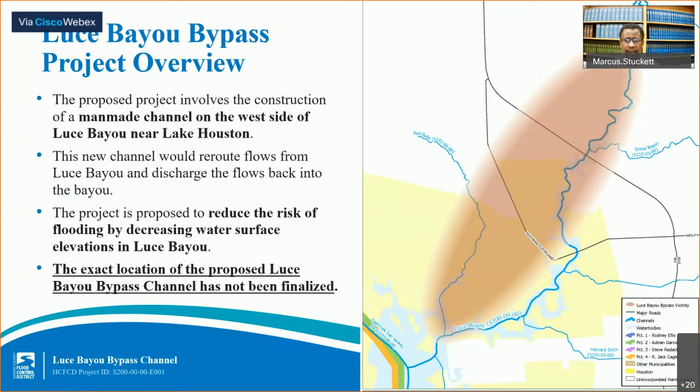The proposed Luce Bayou bypass channel project is one of the recommended projects that resulted from the Huffman area drainage analysis. The Huffman area drainage analysis was a multi-watershed study that involved Luce Bayou, Cedar Bayou, and the San Jacinto watersheds. The Huffman area drainage analysis consisted of an engineering investigation into the sources of flooding in and around the Huffman area and identified and proposed projects to reduce the risk of flooding.

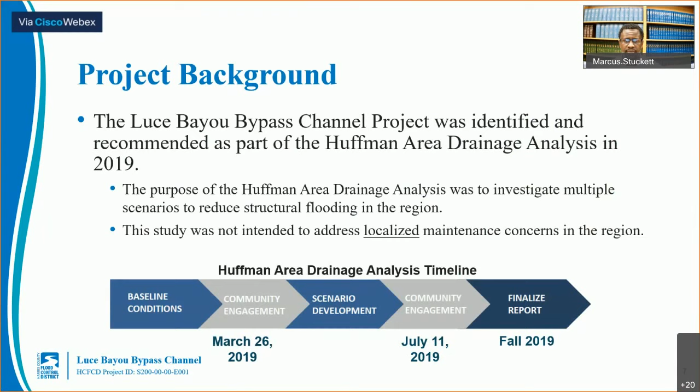The Huffman drainage analysis determined the current level of service for Luce Bayou, analyzed historic flooding events, and met with the community to ensure Flood Control had knowledge of the areas with high risk of flooding. The study team then used engineering models built from total rainfall totals, topographic information, and environmental constraints to identify projects that would reduce the risk of flooding and minimize impacts to existing properties. The study concluded in late 2019 and consisted of two community engagement meetings.

As you might recall from the previous community engagement meeting, the Flood Control District has several structural and non-structural tools for flood damage reductions. Structural tools include stormwater detention basins, channel maintenance, and channel modifications. Non-structural tools include buyouts and demolition of structures built too deep in flood-prone areas where structural projects to reduce flood levels are impractical.

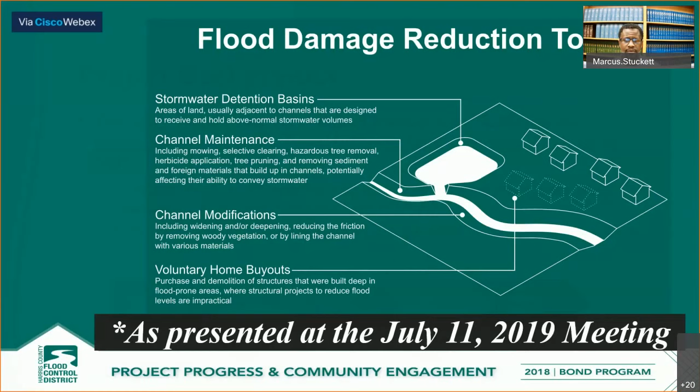As part of the Huffman drainage analysis, different scenarios using these tools from the Flood Control District's Flood Damage Reduction Toolbox were examined. These concepts were then intermingled to determine a combination of scenarios that would reduce the impact to existing structures while still providing a reduction in flood risk. This combination of scenarios includes channel modifications, upstream detention, and a bypass channel.

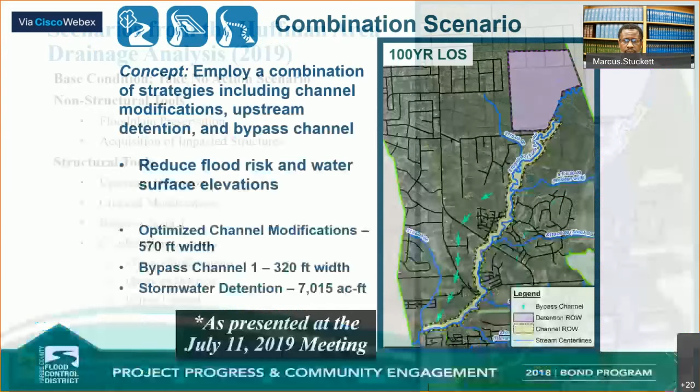The combination of scenarios presented to the community in July 2019 includes channel modifications with a width of 570 feet. The width of the optimized proposed channel provides the least impact to the existing development. It also includes construction of a stormwater detention basin located on the upstream end of Luce Bayou near the county line and provides approximately 7,000 acre-feet of detention storage. It also proposed a 320-foot width bypass channel.

The purpose of constructing a bypass channel is to lower water surface elevations along Luce Bayou and therefore lowering flood risk. This will be accomplished by allowing stormwater to move through the newly constructed channel. Our project team examined multiple alignments before settling on this preliminary alignment. Multiple factors were considered, including minimizing the number of property owners affected by property acquisition, minimizing conflicts with existing buildings, homes, pipelines, and contaminated sites, the existing floodplain inundation, and consideration for the ability of overland flow to get into the channel.

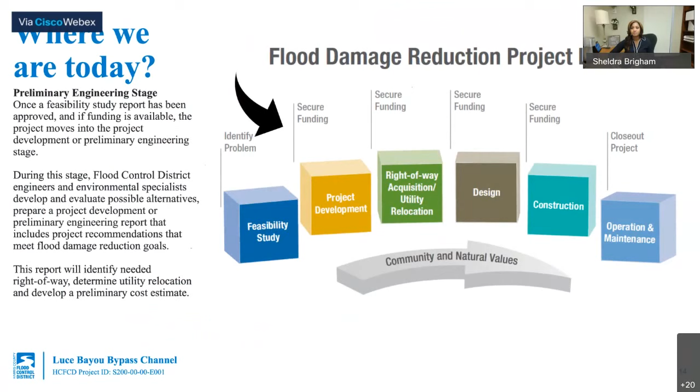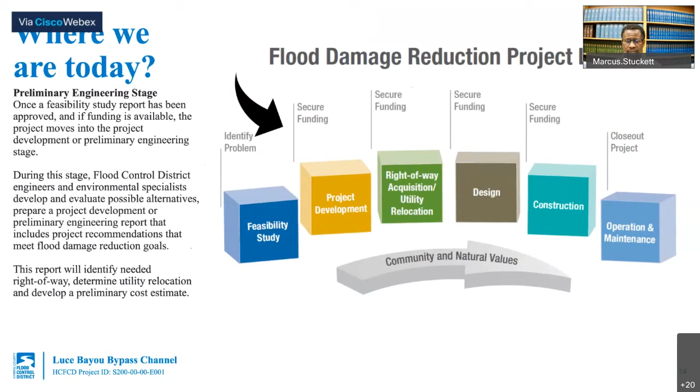So in a standard project, we start off with what we consider a feasibility study. So this is what we met with the community about back in July 2019. So we get what we call a high level look at the drainage issues in the area, and we develop a solution that we think provides the most benefit to the community within the area with the least amount of impact. From there, we go into what we call the preliminary engineering stage, or it's labeled as project

development here. So this is where we start to refine those details that we saw in the feasibility study to carry it to the next stage, which would be design and the right-of-way acquisition. So these things work around the same time, the acquisition of right-of-way and the design. And the design is where we take those ideas, math calculations, and put them on paper so that they can be constructed. And of course, we maintain the facilities that we build indefinitely.

But a typical project, if everything went great and everything was smooth, takes about 9 months for a feasibility study. We take about another 9 months for our preliminary engineering stage. Sometimes the right-of-way acquisition is on the critical path. So it just depends on how long that takes, but that can vary depending on the situation.

But our design usually takes about another 9 months. And for most of our construction projects, we consider it about a year. So taking a project from the time it's an idea to the time that you would finally see something in the ground is usually about 5 years. All right, thank you, Marcus.

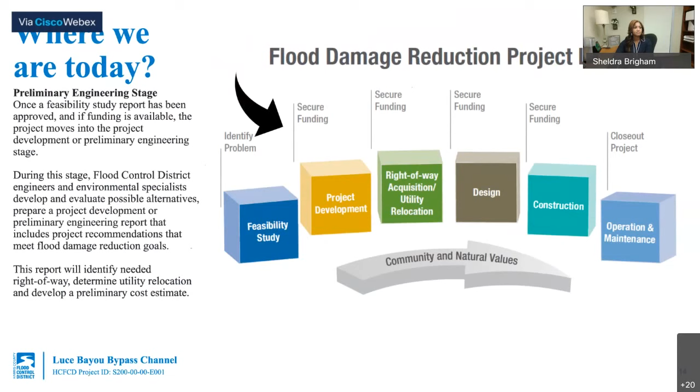Let's see, our next question is from Pam, and she's asking, will the channel be fenced? So that's not something that we typically do. We typically don't fence in our property. A lot of times our property abuts other developments, and those developments have fences, but we don't. It's not our standard procedure to put in fences around our channels.

Our next question, Marcus, is why was this location chosen for this project? So this location, we leaned on our engineers to provide us with the best solution that impacted the least amount of property owners. So that's one of the things that we really rely heavily on our engineers for, to make sure they do the investigations and look at these different alternatives to see whether or not the property that we're acquiring or the benefits that we're getting is equally beneficial for the large portion of the

community. So we looked at different routes. We looked at, okay, how many properties are we going to affect? How many properties are we going to help? We make sure we try to avoid any potential contaminations. So it's been a long process to try to exactly nail this down.

And I think what I would add to that, I think there was a question about the different alignments. We had preliminary alignments on the website, which we eventually pulled down because it was creating confusion with the public, because we didn't have enough information at the time to let the public know exactly where we were going. And that's something that we have to work through. Make sure that the information that we're putting out doesn't create a concern when it's unnecessary. So that's just one point I'd like to add.

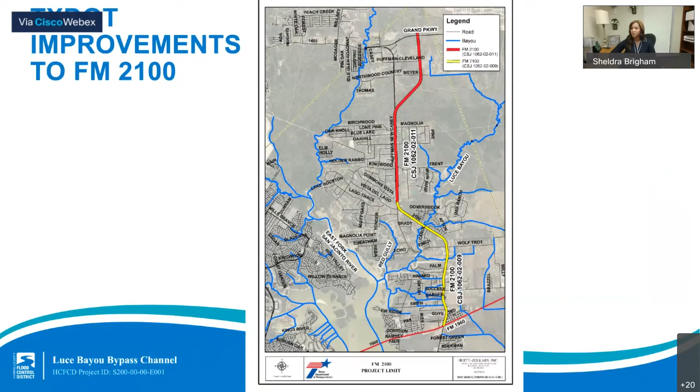Thank you. Next question for Marcus. This is from James Kramer. Will Luce Bayou itself be made wider or deeper? Yes, that's a good question, and something important that James asked was he said 2 words: wider and or deeper. Actually, the answer is it will be wider, but we don't have plans to deepen it. So that's another phase of the project, but just understand it will be wider. We do expand on widening it, but we don't anticipate deepening that section of the channel.

And Marcus, how would this project impact other existing infrastructure in the area? Will there be any negative impacts downstream? No. So one of our missions is to provide these flood damage projects that work. And so we don't remove an area from risk and transfer that risk to other properties that are downstream.

So part of our analysis in this preliminary engineering stage, before we go to design, before we purchase all of the property for the alignment, is to make sure that what we put in the ground does not negatively impact others in terms of water surface elevation. So I wouldn't lower the water surface elevation in the area upstream only to find out that the water that came upstream is now downstream and creating an impact for someone else.

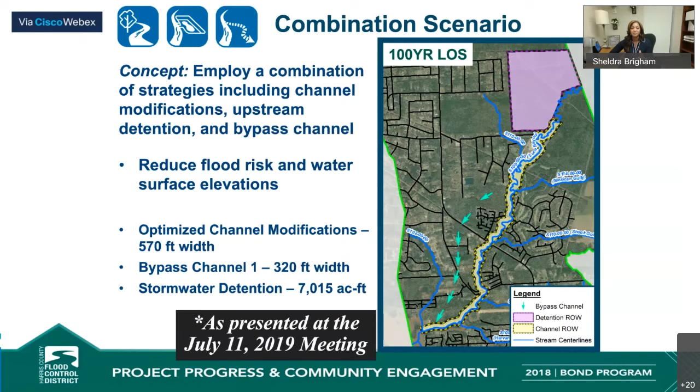And how will Flood Control District restrict access to four-wheelers and other trespassers along the proposed maintenance buffer area? Yeah, that's a huge issue that we see across the county. I guess the only thing I can offer is that, if you notice there's a lot of traffic like that, four-wheelers and things trespassing on the district's right of way, then we can always make sure that we work with law enforcement to make sure that they are patrolling the area to try to stop that, because it creates a problem for us as well when there are heavy vehicles or ATVs on the right of way. They create rutting of the right of way, and it just creates all types of issues for us.

So while we can't restrict it, and we don't do anything other than having guardrails at the major crossings, of course, they go around those. But one of our ways is, especially in areas where we know we have that type of activity happening, we try to make sure law enforcement is aware and try to get them to go out there periodically to make sure they're doing checks to keep people off of that.

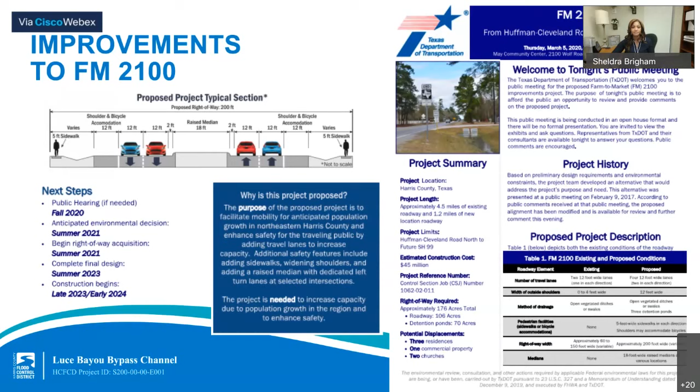All right, and another resident sent in the question, what are the projected benefits for this project? How much could water surface elevation be reduced in a 100 or 500-year event? Yes, and so that's a question that it's kind of early for us to provide that information. What I can say is that what we've looked at up to this point, we'd be looking at about a 4-foot drop in water surface elevations along Luce Bayou, but that is so preliminary that I'm not even comfortable with saying it. I'm just saying we have at least looked at it and we know what that number is, but that could change based on the intake structure that we are working on developing right now.

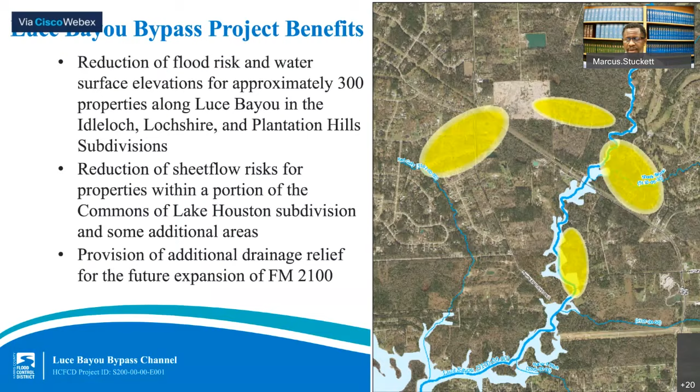All right, and sort of back to a question we asked earlier, going a little bit deeper into it, Marcus, you talked about funding for this project. How does the Flood Control District pursue funding for projects like this? What options are out there? A lot of what we look for is help from the Natural Resources Conservation Service. They at times put out grants that allow us to develop, but it just depends on what the application looks for. We have the CDBG application, so that's the Community Development Block Grants, and that also splits and shares funding.

So the district would provide a certain percentage, and the grant would provide the other percentage, and it's all based on being able to reach a certain amount, and also help certain residents with flood damage reduction. So there are multiple sources that we look at. In most of my presentations, there's a spaghetti model that shows all these different agencies, and on that exhibit alone, there's probably about 9 different agencies, and between each of them, 3 or so different sources that we try to get some of that funding for Harris County.

And Marcus, we've been able to answer a lot of questions tonight, but there are still some answers that we're going to be gathering and that are going to be coming in as things progress. Why do you feel it's important to have this meeting, to talk to folks about this now?

Yeah, and what we've been getting is a lot of questions, and we've been working on trying to get answers, and so the district's silence has been taken as somehow we're hiding information, but the problem is when we start sharing things too early, then we start getting concerns from the residents. We start having residents calling and really being concerned.

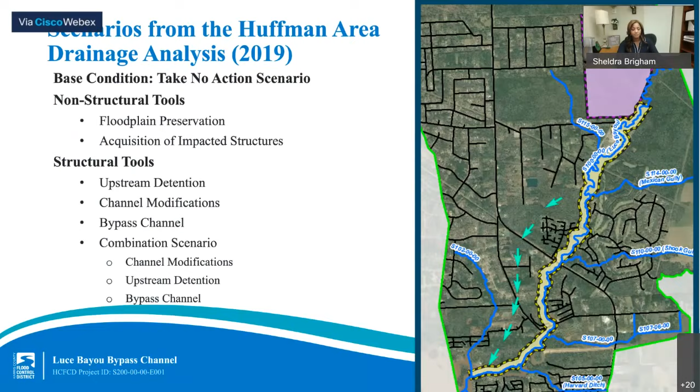Marcus, when we talked earlier about funding options and how we fund our different projects, mentioned funding for this program, but this one doesn't actually have any federal funding. Is that right? Yes, that is correct. The funding for the Luce Bayou Bypass project is, as of right now, a 100% bond funded project.